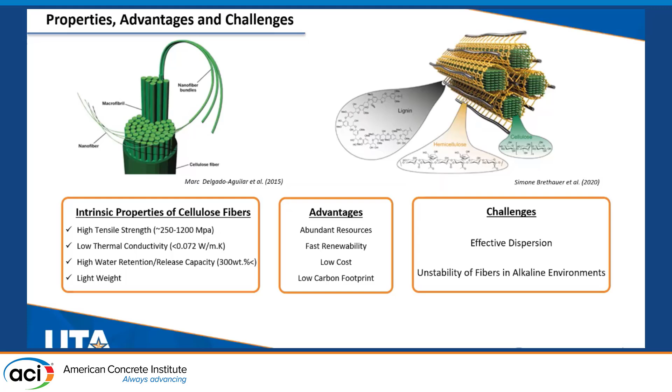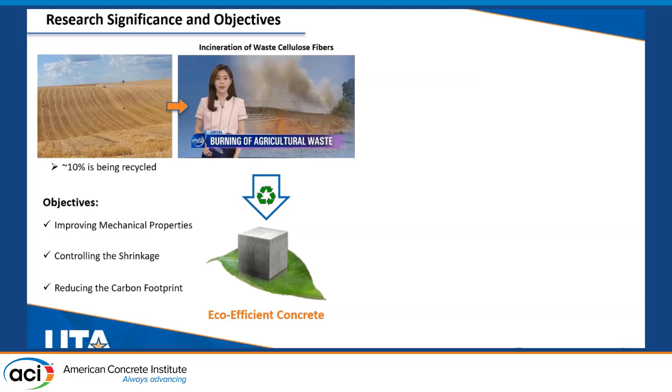However, effectively using these fibers in construction materials requires certain challenges to be addressed. For example, they need to be effectively dispersed to avoid agglomeration, and they should be protected in highly alkaline environments from disintegration. A great source of these fibers is agricultural waste that is often incinerated within the agricultural industry, with detrimental impact on the environment due to the emission of carbon dioxide.

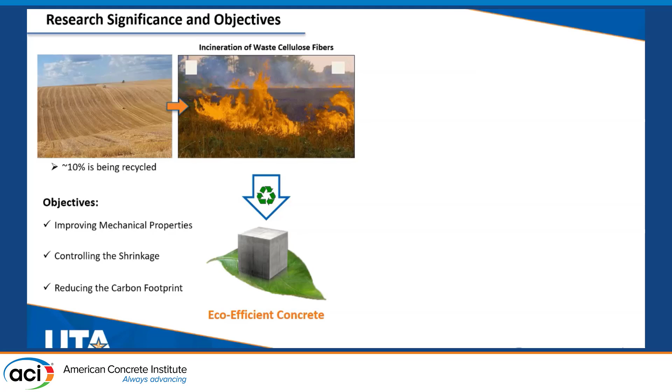Most specifically, compared to the conventional cellulose fibers, these fibers have a lower carbon footprint, on average about 76%, which adds to the importance of these fibers for producing fiber-reinforced composites.

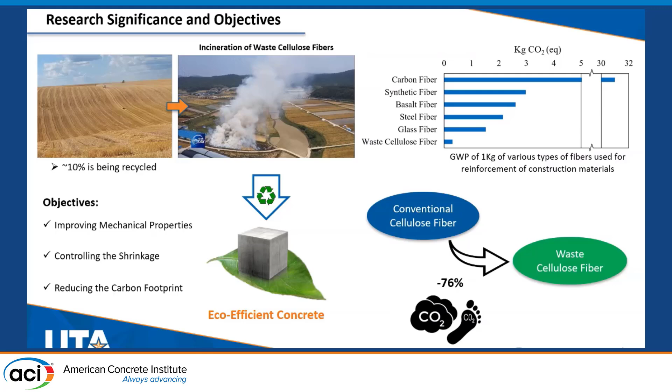With that said, in this presentation I will show you the results of our characterization of pulped wheat straw, which we used as our waste cellulose fibers, followed by the dispersion technique that we applied on these fibers. Then I will continue with their effect on the microstructure, how these fibers affect the hydration reactions and hydration products.

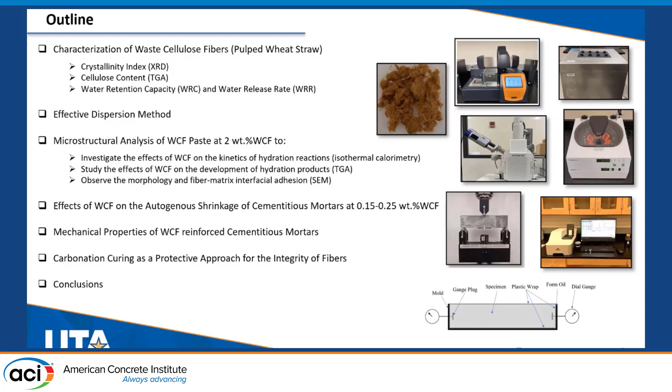Then I will continue with the effects of these fibers on the autogenous shrinkage of WCF mortars and their mechanical properties at different dosages. Next, I will continue with the protective approach we used for the integrity of these fibers, which was carbonation curing, and I will wrap up my talk by presenting the main conclusions.

In case of characterization, polymeric chains of these fibers consist of both amorphous and crystalline regions in their molecular structure. Crystallinity index refers to an indication of the relative amount of crystalline regions in the molecular structure of these fibers, which along with the amount of cellulose and hemicellulose they have can determine their various properties, including mechanical properties and thermal behavior.

For determination of crystallinity index, I used a peak height method using XRD spectrum that resulted in a CI equal to nearly 60%, suggesting the presence of amorphous regions in the molecular structure of these fibers. Also using TGA, we quantified the amount of cellulose and hemicellulose, which was nearly 19%.

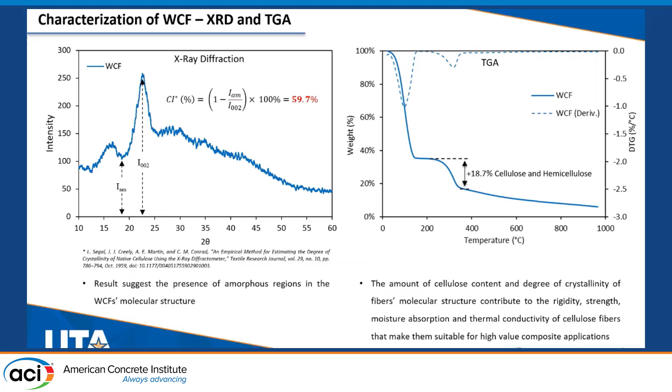Next, another property of interest is the amount of water that these fibers can absorb, because the magnitude of reductions in the autogenous shrinkage is a function of the moisture supplied by these fibers to activate the internal curing mechanism and reduce the internal stresses caused by self-desiccation.

For determining water retention capacity, I used the standard centrifugation technique such that a certain amount of fibers is soaked in water, left to be fully saturated, and then their mass after centrifugation was periodically recorded while being oven dried. Based on our measurements, these fibers could successfully absorb nearly 10 times their weight and release it in approximately 11 days.

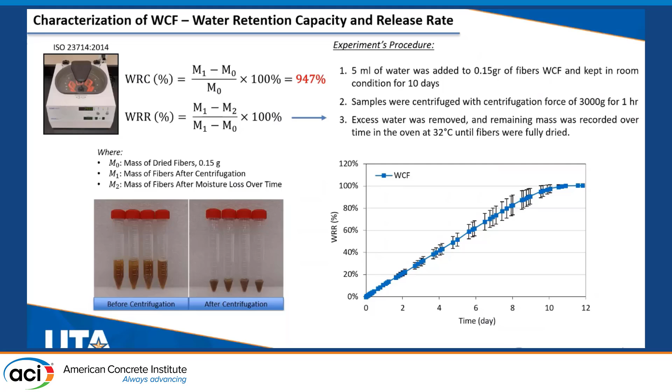In case of dispersion, as I said, the effective use of these fibers requires a successful dispersion to avoid agglomeration. We used shear mixing as our dispersion technique, and a zeta potential experiment was conducted on the suspension of these fibers to evaluate the quality of dispersion.

We applied this on the suspension of as-received fibers, which resulted in a polymodal distribution of zeta potential values due to the heterogeneity of surface charges, resulting in an unstable suspension. To overcome this issue, I followed the dispersion technique patented by Professor Shah and Professor Konsta using surfactants, which resulted in a monomodal distribution of zeta potential values that led us to a suspension with improved stability suitable for use in construction materials.

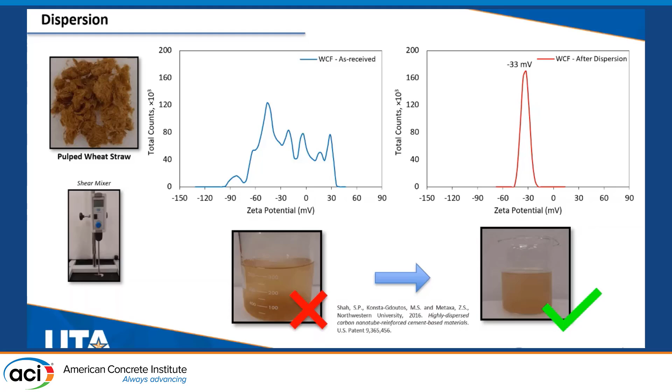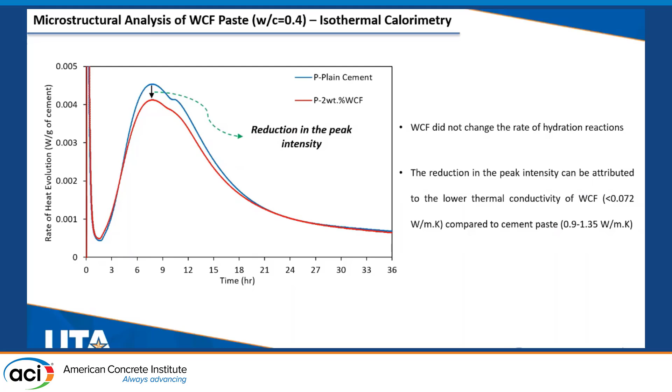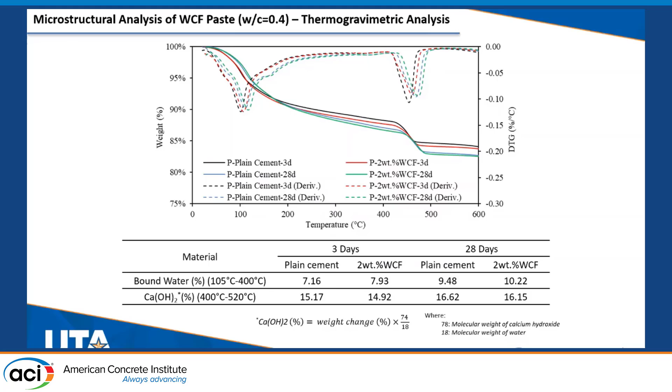Also, I used thermal gravimetric analysis to quantify the hydration products, namely bound water and calcium hydroxide. According to our results at different ages, the difference between these two products was less than 1%, which shows that incorporation of these fibers didn't change the quantity of hydration products. Now that we are confident these fibers don't affect hydration reactions and products, we can proceed with their evaluation on the macrostructural performance.

Starting with autogenous shrinkage, I measured the autogenous deformation of WCF mortars at a very low water to cement ratio at different dosages, which led to significant reductions of autogenous deformation of up to 65% for our 0.25 weight percent of cement sample after 7 days of hydration.

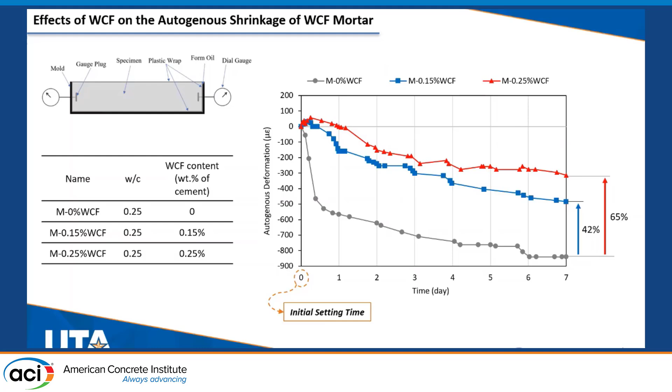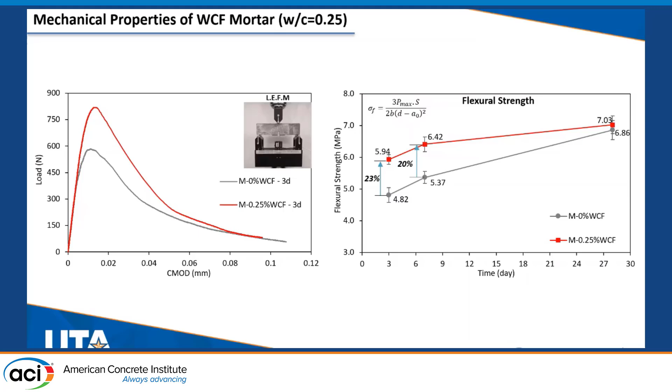Then next is the mechanical properties. In this case, I used linear elastic fracture mechanics to plot the applied load versus the crack mouth opening displacement, and using the peak load of this curve, I plotted the development of flexural strength. You can see that WCF mortar surpasses that of the plain mortar, especially at the early ages, showcasing at least 20% enhancement.

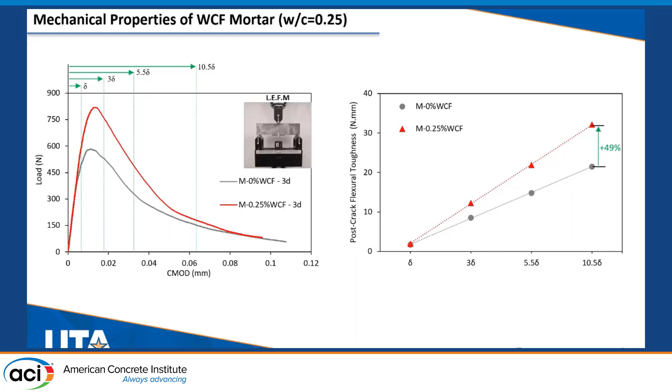Using the same graph, I calculated the area under these two curves to determine the post-crack flexural toughness at different deflection points. Up to 49% enhancement was achieved, indicating the superior energy absorption capacity of WCF mortars.

Extending our mechanical testing to 56 days, we noticed a reduction in the mechanical properties, such that the load CMOD curve of the WCF mortar at 56 days falls below the load CMOD of the same mix at 28 days.

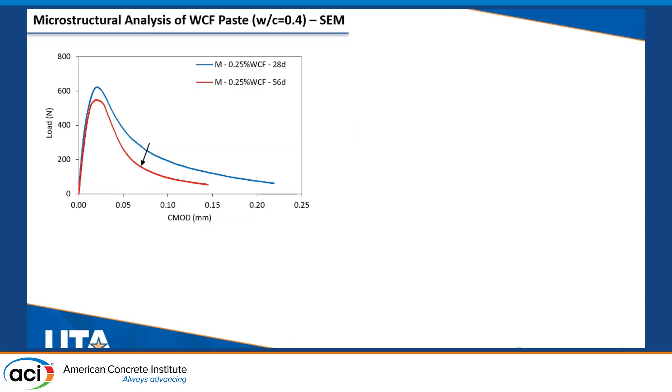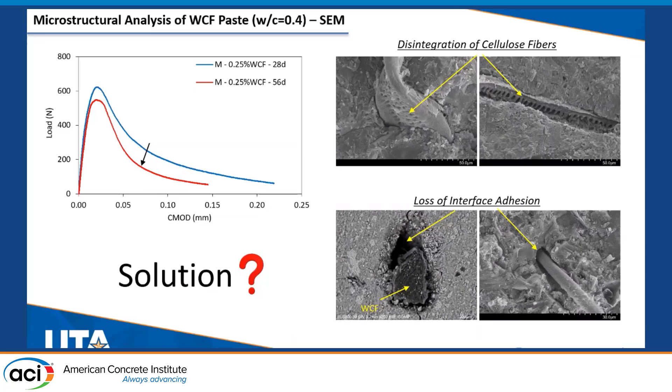Using scanning electron microscopy, I noticed that these fibers have undergone disintegration. Also, after they release the absorbed water, they shrunk, and a loss in the interfacial adhesion is observed. Both of these phenomena can explain the reductions in the mechanical properties and must be addressed to preserve the long-term mechanical properties and overall performance of the composites.

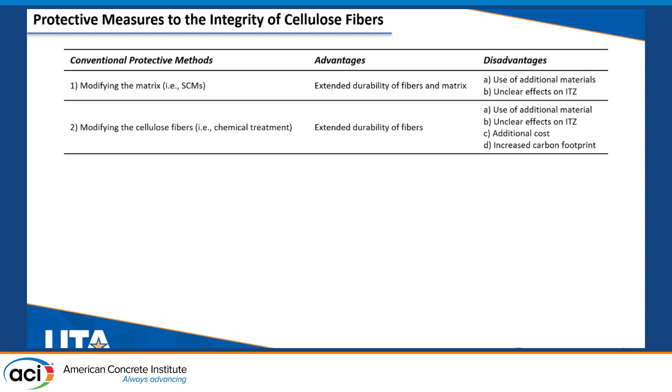The conventional protective measures include using supplementary cementitious materials to modify the matrix, or modifying the cellulose fibers themselves through different chemical treatment procedures. Although both methods are effective in enhancing the durability of the fibers, there are some disadvantages. Most specifically, the loss in interfacial adhesion occurs at later ages, so the effect of these methods is not very clear to us on the interfacial adhesion.

Instead, our focus turned to the exploration of carbonation curing, which is an environmentally beneficial approach that repurposes carbon dioxide. Carbon dioxide penetrates within the pore structure of the material and reacts with hydrated and anhydrous phases of cement to produce calcium carbonate. This recently generated calcium carbonate serves to occupy the gaps between the fibers and the matrix to improve the interfacial adhesion as well as protecting the fibers from disintegration.

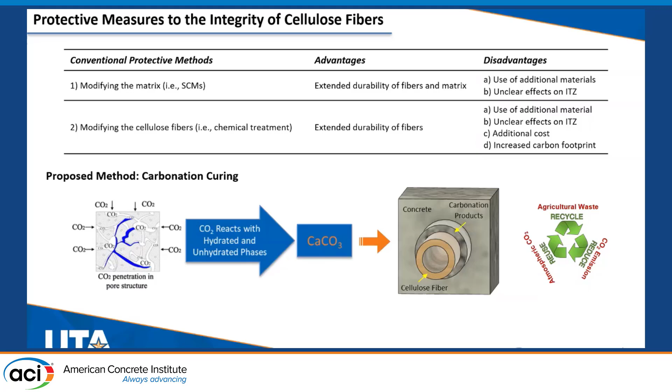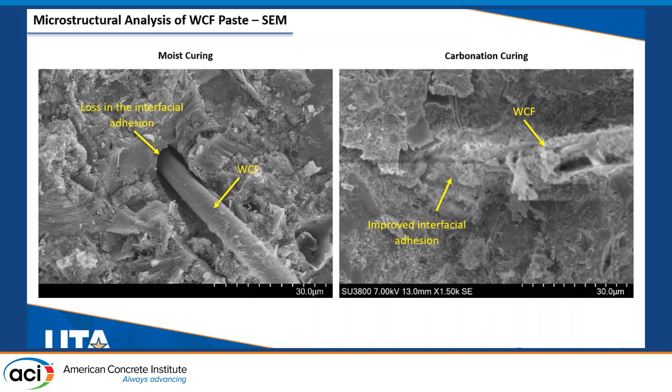Our SEM observations prove this, such that the loss in interfacial adhesion in a moist cured sample is completely filled with products after carbonation curing, resulting in improvements in mechanical properties. You can see here for compressive strength and flexural strength, especially at 28 days, we have reductions in the mechanical properties for moist cured samples.

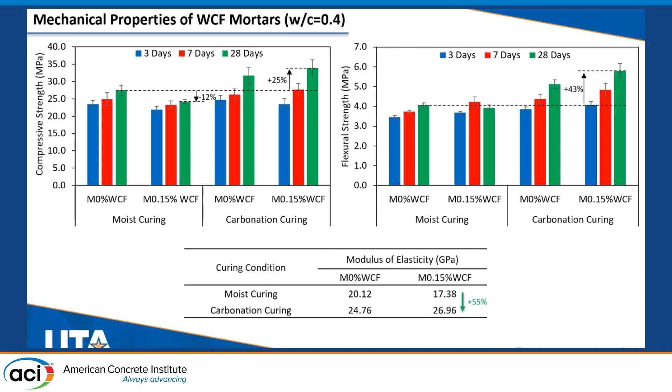That is completely compensated for after carbonation curing, resulting in 25% enhancements for compressive strength and 43% improvements for flexural strength. Having the modulus of elasticity calculated for carbonation cured samples, not only did the results not decrease, but also 55% enhancement was observed for the corresponding moist cured specimen.

In conclusion, using waste cellulose fibers, I produced eco-efficient composites with enhanced mechanical and shrinkage performance and lower carbon footprint and cost of composite production.

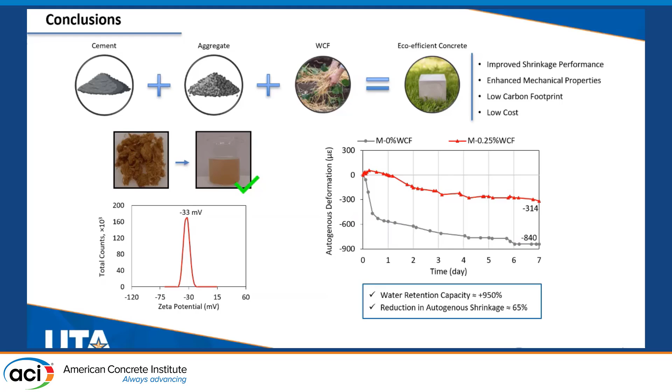According to our results, a monomodal distribution of zeta potential values was observed, resulting in a suspension with improved stability. Also, because of the high water retention capacity of the fibers that could mitigate internal curing stresses caused by the self-desiccation mechanism, significant reductions in autogenous shrinkage values of up to 65% were observed.

In terms of mechanical properties, using WCF we could enhance the flexural strength and energy absorption capacity by up to 25% and 50% respectively, especially at the early ages.

And to preserve the long-term mechanical properties, we had to protect the fibers, and we applied carbonation curing as our protective method, which resulted in improved interfacial adhesion and enhanced mechanical properties.

Of course, there are a lot of other properties to check, that's why we are here, the research is in progress. And these days we know that these fibers can enhance the carbon uptake, and that's what I am investigating in my research.